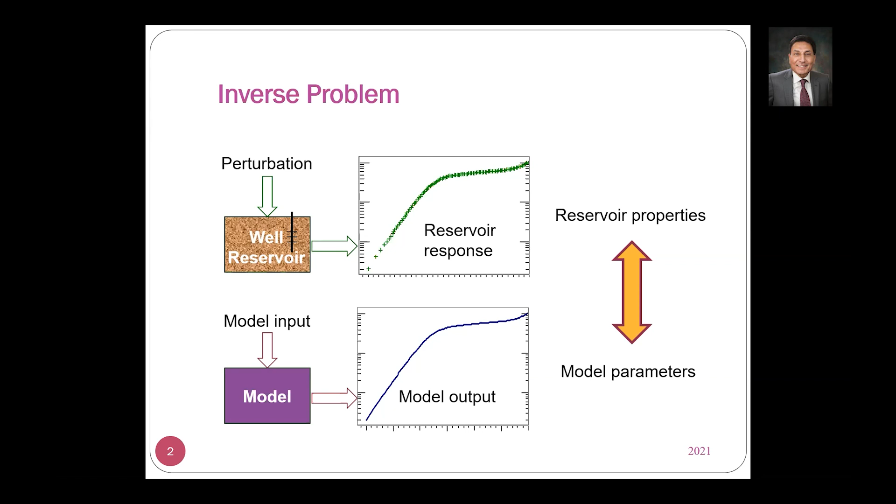The way we do that is, if we have a reservoir model like the one you see on the left side of your screen, we actually perturb that reservoir and watch how it reacts to that disturbance. Then we have a model based on the physics, and we send the same input as we perturb the reservoir, and watch the response of the model. What we try to do is make sure that the model output and the reservoir response match, and from there we can deduce the reservoir properties.

Specifically in well testing, we do the perturbation first by lowering a pressure gauge into the wellbore, and then most of the time we change the flow rate. When we change the flow rate, we watch how the pressure in the well changes with time. As you see in that picture, we try to match the data collected from the well, the dotted points you see there, with the model calculated solid curve. When they match, we know that the properties we entered in the model can be considered the same properties as in the reservoir.

Once we have good data, we look at it and identify different flow regimes for the well test: one flow regime has to do with the wellbore properties, one has to do with fractures around the well, and one has to do with the reservoir properties itself. Once we identify the flow regime, we select a well and reservoir model based on that. To do this, we usually need some help from additional data like geology, well logs, cores, well completion, production data, etc.

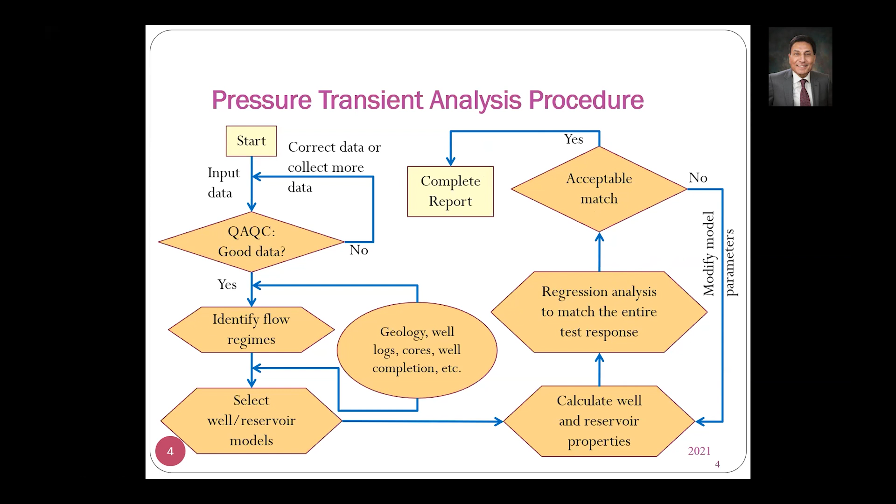Now, when we talk about gas wells specifically, in the development of transient testing models, we originally used slightly compressible fluids like oil and water. But gas properties are strong functions of pressure and temperature, so they are not what we call a slightly compressible fluid.

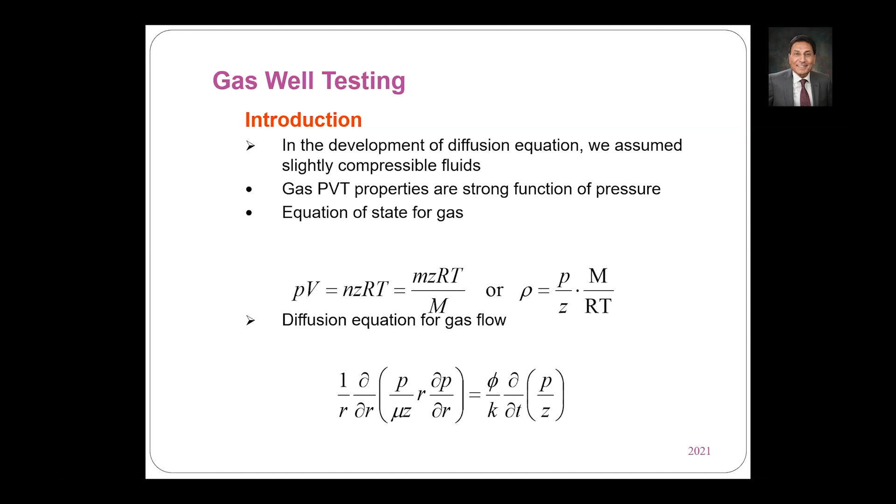So we use the equation of state for gas, which you're all familiar with, and we need to use this information to analyze the data from well tests. So what did people do a long time ago?

They said, well, if the reservoir pressure is greater than something like 5,000 psi, then the pressure is high enough that the gas will actually perform like a liquid. For that part, they simply analyzed the data using pressure versus time, just like they did with oil and water wells.

And they said, if the pressure is less than 2,000 or 3,000, somewhere in that range, then the properties of the gas, the viscosity and compressibility, would be constant, and we can use the square of the pressure rather than the pressure in analyzing the data.

Now this part in the middle became the no-man's-land, where neither of these two methods worked very well. However, there's a lot of literature, a lot of work done, that actually uses both the pressure and the pressure square.

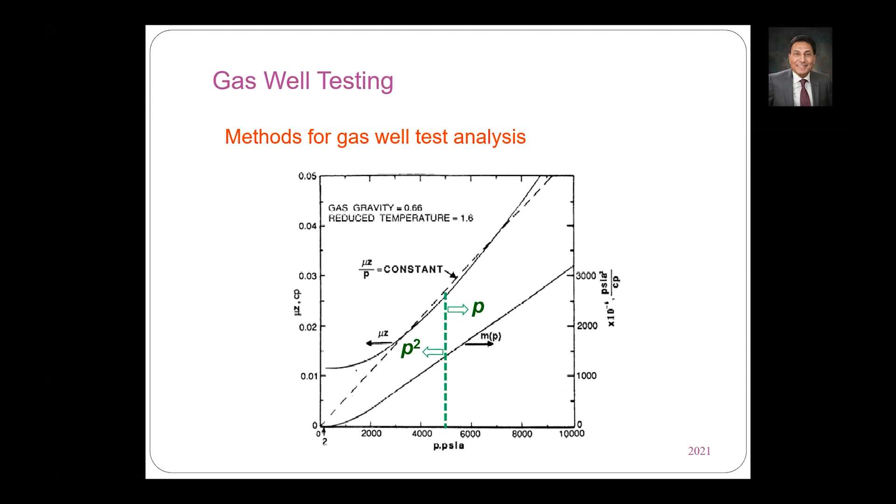Then in 1966, Rafi Al-Hussainy and Hank Ramey, who were doing research at Texas A&M University, provided us with a new solution.

They said that rather than using either the pressure or the pressure square, you can use a function called the pseudo pressure function. You can see the pseudo pressure function is the pressure over the viscosity and the compressibility.

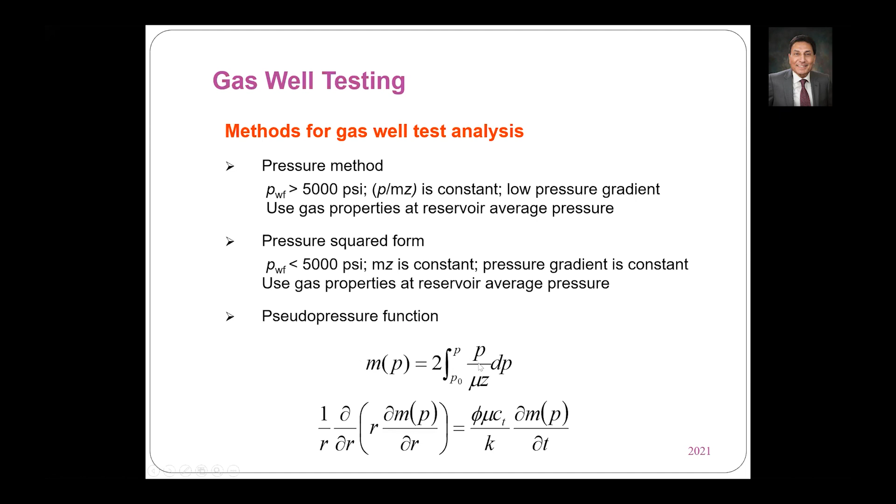It's an integral of this parameter over a range from a given standard pressure to the actual pressure that you have. The point they made is that if you use the pseudo pressure function, then this function is valid no matter which pressure range you're in.

So the values of the pseudo pressure numbers are usually something like 6 times 10 to the 12, to the 6, or 7 times 10 to the 6, a large number. Some people don't like to look at the number that way; they prefer numbers closer to the pressure number.

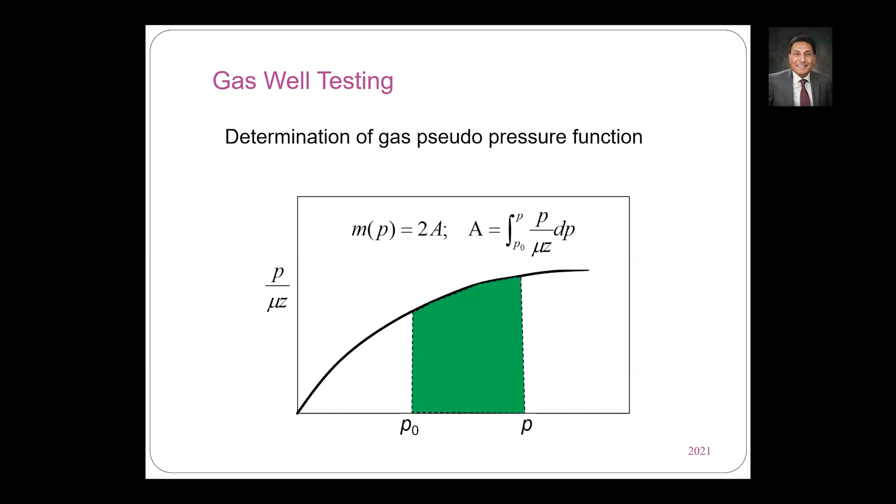So they figured maybe we can use something called the standardized pseudo pressure, in which they simply divide the pseudo pressure by the reservoir pressure. This way they find numbers closer to pressure, but it doesn't change anything as far as the analysis. The pseudo pressure function is valid no matter which pressure you have, it will work for you.

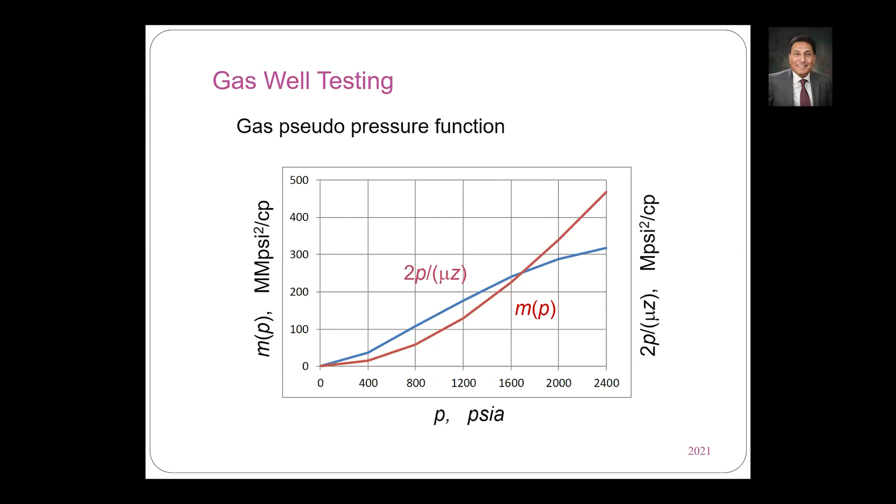And we do the analysis with the pseudo pressure just similar to the analysis we do for slightly compressible fluid like oil and water. Now, one of the other important things about gas wells is that because the viscosity of the gas is very low, the flow rate in the well inside the reservoir is very high.

This means that the pressure drop is much higher than if you have laminar flow. If you don't take into account the fact that you have turbulent flow, you have this larger pressure drop, and that larger pressure drop will actually show up as damage.

We all know that one of the parameters we calculate from pressure transient testing is the damage. But if we are not careful, the number that we calculate is actually made up of several parameters, not just the actual damage around the reservoir.

We also have something about partial penetration, if the well is not completely penetrating the reservoir, if we have perforations that are not completely functioning properly, something about fractures, segmented well performance, and so on. All these are beyond the scope of this lecture, but we'll touch on these points here.

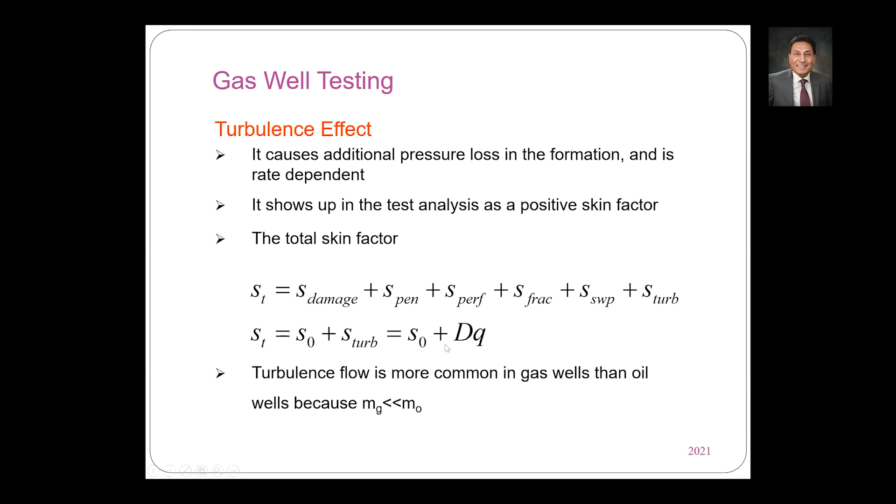So the turbulent flow skin is actually a function of the flow rate. You can think of it as a constant times the flow rate. So now you can see that the equation of the total skin is like the equation of a straight line, where this is the slope and this is the intercept. So the equation would look something like this.

So in order to find out what the actual skin is, we have to run a test at different flow rates, and then make a plot like this where you have the measured skin versus the flow rate, with different points from the different flow rates. When you extrapolate this line to a flow rate of 0, the intercept would be the actual skin.

I would like to show a demonstration here for this part. So I'm going to go ahead and change the screen that I'm sharing. I'm going to open that icon there on the left.

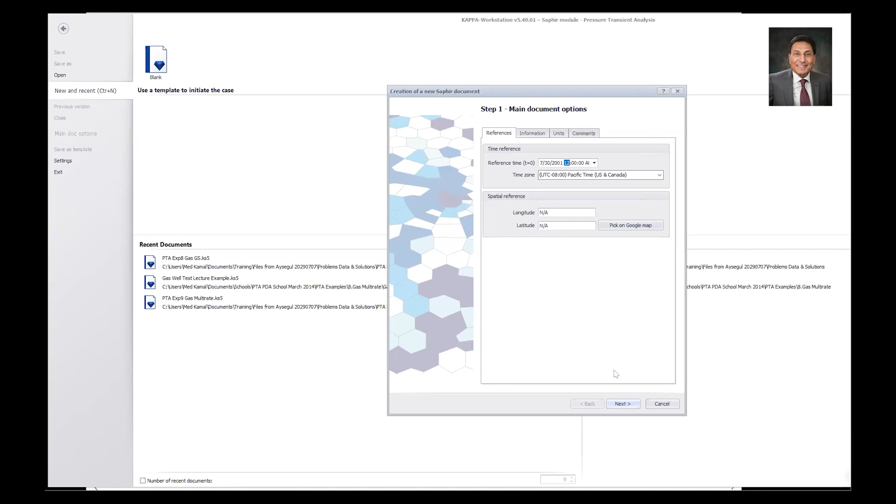This is called Saphir. Kappa has different parts, but the pressure transient one is called Saphir, which you can see now. And with that, I just put the reference time, and I'm going to say next. In this example, all I'm trying to do is demonstrate the concept.

So we are not going to be worrying specifically about the specific parameters. One thing you can see on this screen is that there are some parameters marked or colored in red. We need to give credit to the engineers from Chevron who came up with the idea and suggested to Kappa that whenever there are values already populated, not the values the engineer wants to input, but values that are there by default, they need to be marked so the engineer recognizes that they need to change this number because it's simply not what they have.

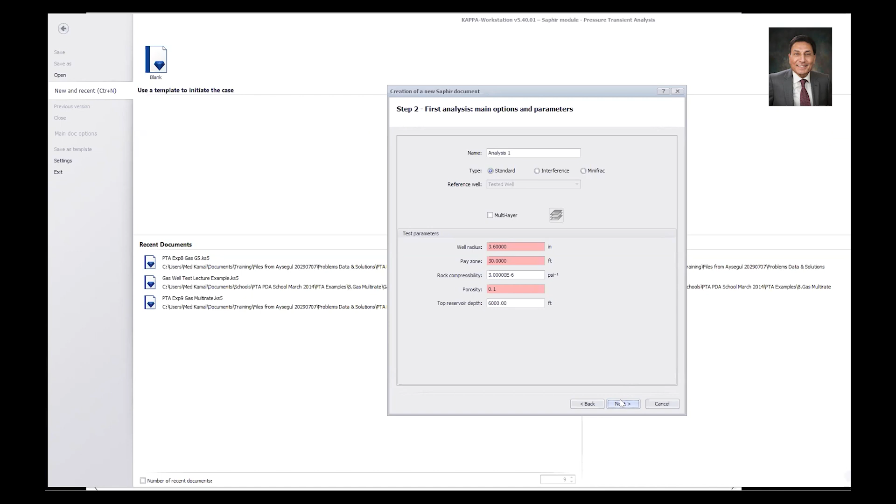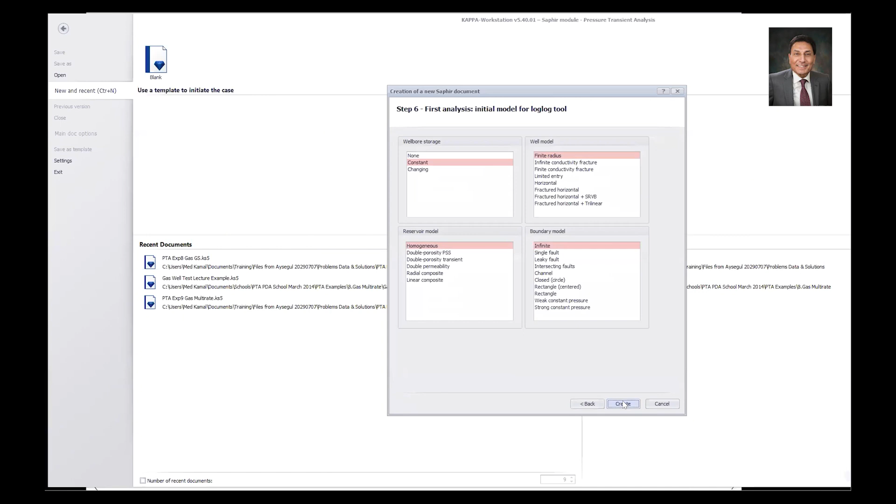The first data that we need to load is the flow rate. Actually, in the software, you follow the icons from the top to the bottom that give you the steps you want to take. So for the flow rate, I already have a file for that, and I am going to click on that file and open it.

And in order to characterize these numbers, the program shows them like that. I'm just simply getting the program to work. My intention in this lecture is not to teach people about software—I'm just using the software to show a problem.

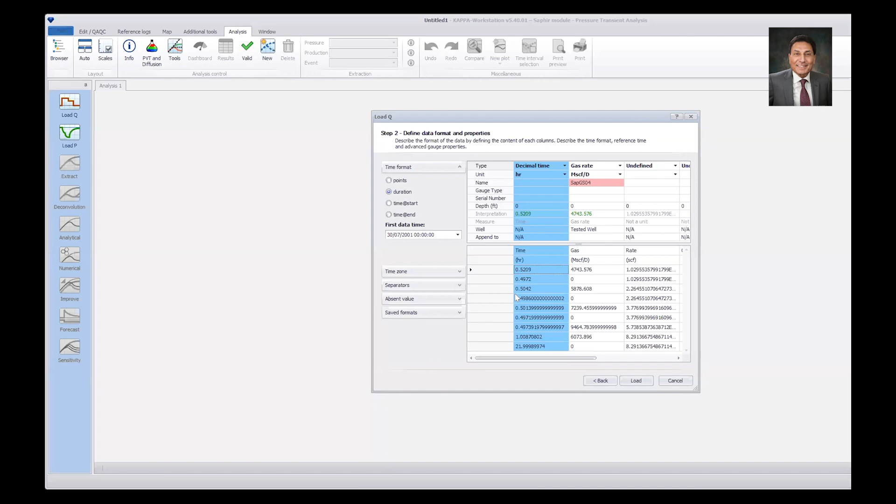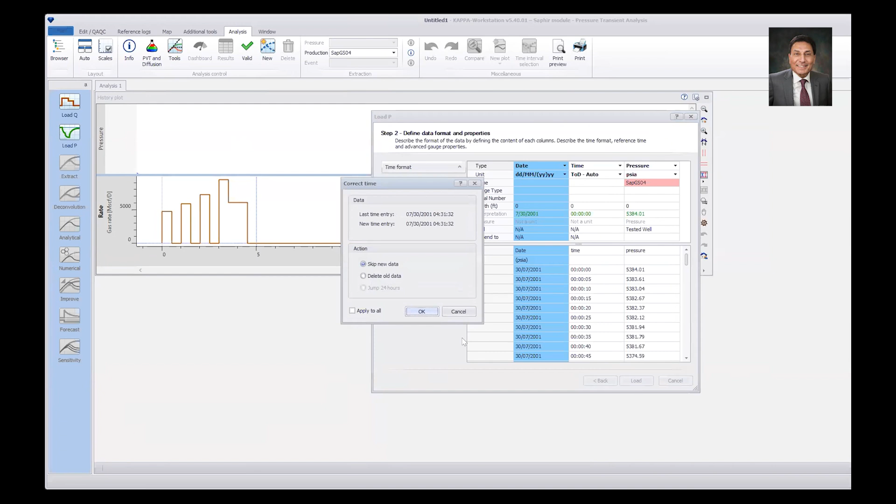So I'm going to load the flow rate, and then we're going to do the same thing for loading the pressure. I'm telling the program that I have a file where I have my pressure, and again I am going to tell the program to make sure I have the columns where the time and the pressure are, and we're going to say load. This is simple.

So you see in this example, what we did is we flowed the well at different rates, and at the end of each one of these rates, we have a buildup—a short buildup—and then at the end we have a very long buildup. This is usually the way we run the test.

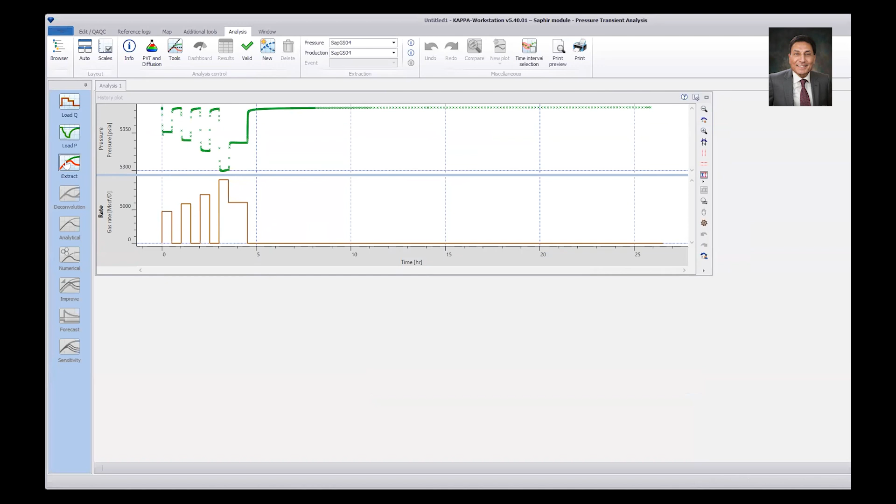Now, to do the analysis, we're going to start by extracting which pressure we're going to be working with. The program usually understands that you most likely want to use the last buildup, so it will allow you to extract it.

If I say OK, then the program, by default, assumes that if I draw a flat line, that will give me the value of the permeability. A unit slope line will give me the value of the wellbore storage. So that's the initial setup from the software, and I want to do an analysis on it.

So I'm going down there, going to the analytical model, and I'm going to say generate the model. Now you can see the model I have is not bad, but I can actually improve on this match. So I'm going to go to the improve part, and when you go to improve, you have the right to select which parameters you want to regress on.

We are going to use these parameters: the permeability, the skin, and the wellbore storage. I'm going to say run. Then the program, you can see, has a very nice match.

But this very nice match was because we analyzed the data from the last buildup. So if you look here on the history plot, you see that I have a very nice match at the end, but when I look at a different flow rate than this last flow rate, the match is not very good.

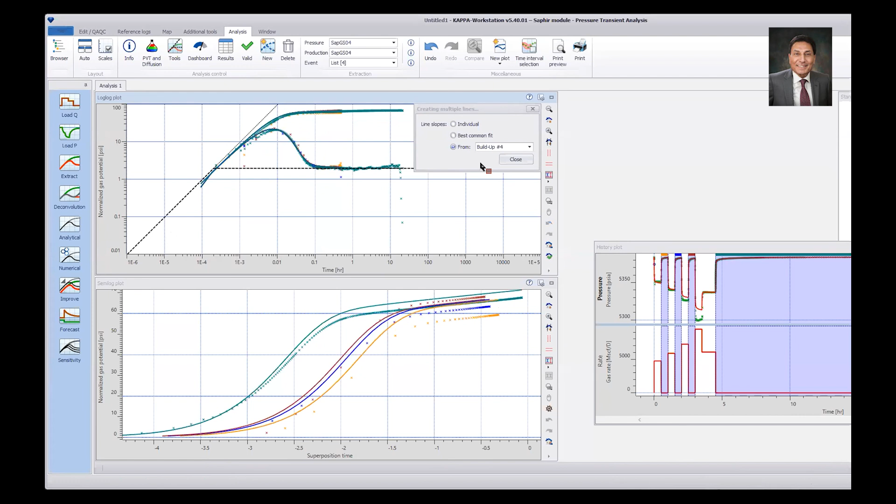This is the only place where I actually have all the buildup, and now you can see I have all the straight lines there. The program, based on each straight line, calculated the skin, and now it gives me a plot of skin versus flow rate.

So in order to do the match with the history plot, I'm going to go to this dashboard one more time. I really don't intend to teach software, I'm just using it to show the concept. So I'm going to look at the semilog result.

You can see here it's showing the semilog result. This is the skin at the flow rate of 0 - it's only 3.4. If you remember, when you ran the program at the beginning, it gave a skin of about 8 something. That was actually the skin at the last flow rate, but part of it was because of turbulence. This is the skin at 0, and this is the slope of the line.

So if we take this data and move it to the analytical solution, you can see that now I have a much better match on all the flow rates. I can actually also now, if I need to, maybe I should go.

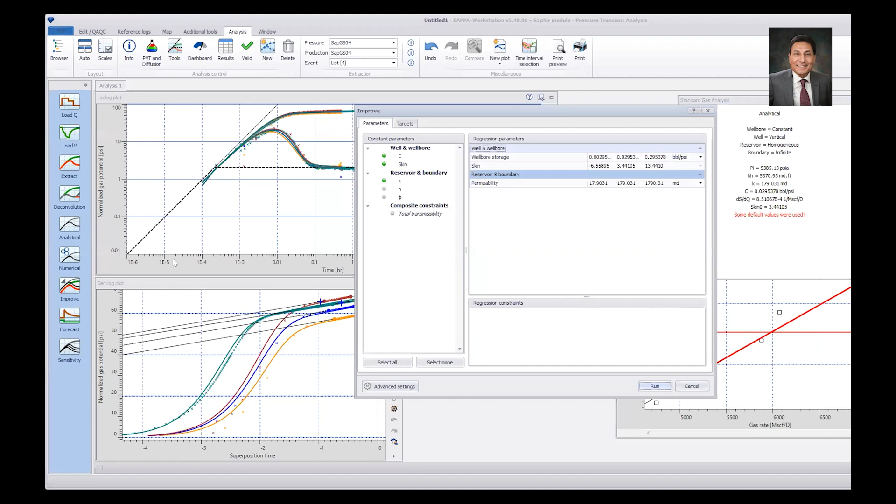So if I go to improve, I want to improve on the history plot, not the log plot. So I'm going to say I'm improving the history plot, and run. The improvement is small because we started with good numbers, a good match.

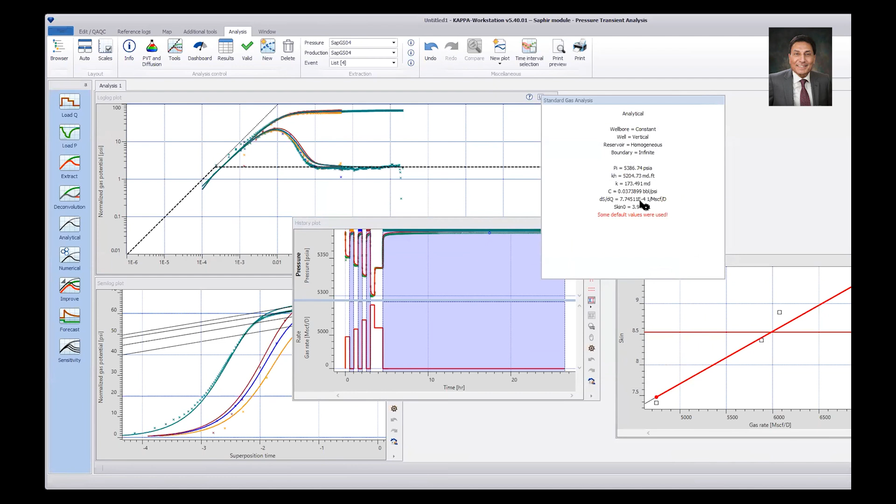So now this is the final result - I now know exactly what my skin is, 3.9, what the slope of the line is, and again what the value is. That is all I needed to do for that example. So I'm going to close this now.

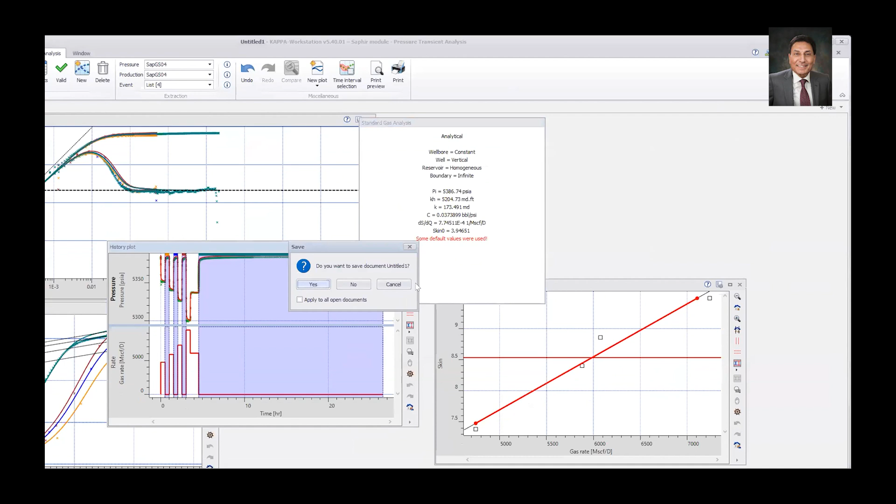Model demonstration. All right, so the next item we need to talk about for gas well testing is deliverability testing.

This is one of the things that's different for gas wells than for oil wells, because you produce gas from wells and you don't store it in tanks - you actually have to immediately transport it to wherever you're going. So there was a question about deliverability testing.

It's a nice story, and I think it's very important for people to recognize the origin of deliverability testing. In the United States, there are states that are rich in oil and gas, and some states are not. So people producing gas from oil-rich states were actually producing gas at very high rates.

There was a question: if everybody produces their gas at the highest possible rate, two things are going to happen. The price of gas is going to decline, and they are going to exhaust all the resources. So they figured out they needed a way to control gas production from all the states to keep the price reasonable and preserve resources.

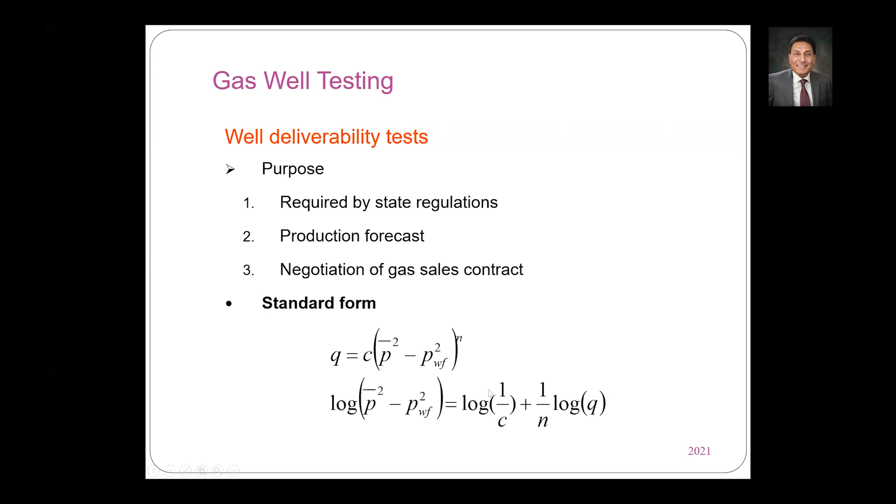So if I make a plot of the flow rate versus either the difference in the pressure squared or the pseudo pressure, then I can find a straight line. The slope is 1 over n.

And the point is that if I flow my well and get to the point where I have it completely open, in other words there is no back pressure, then at that pressure, this is the flow rate. This is the absolute open flow rate. And based on that absolute open flow rate, that's what's going to determine the deliverability of the well.

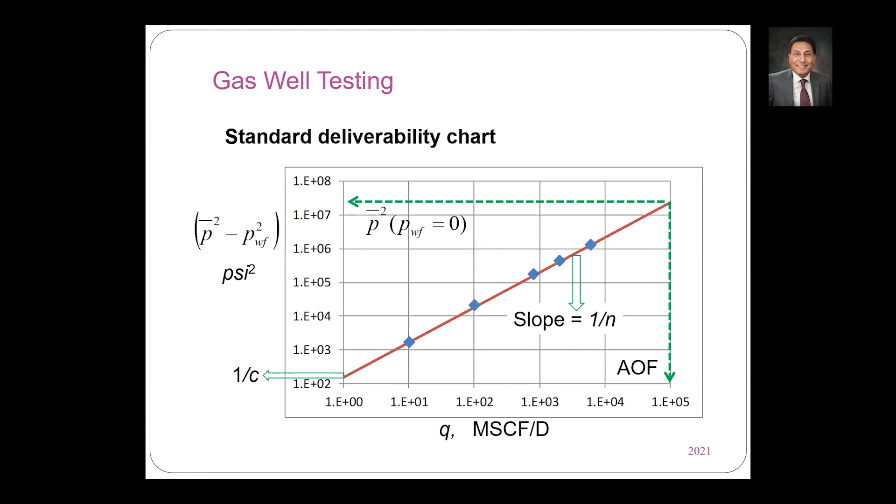So the point is, who's going to do that? You're not actually going to open your well and let it flow for a long time in order to do that, because when you look at the behavior, the slope of the line is going to be the same — it doesn't matter how long you flow the well. But then the intercept C actually decreases with time as long as you produce through the well, and asymptotically it gets to the point where this is the value of C that we wanted to use.

So in order to do that, we said, okay, if I produce my well at different flow rates, and at some time I measure the pressure, then I'm going to have a straight line that looks like this. Now if instead I flow my well for a longer time, I'm going to find a straight line again with the same slope, because 1 over n is the same. However, as time goes by, I find that straight line keeps shifting to the left, in order to get me to the point where I have calculated the value of C.

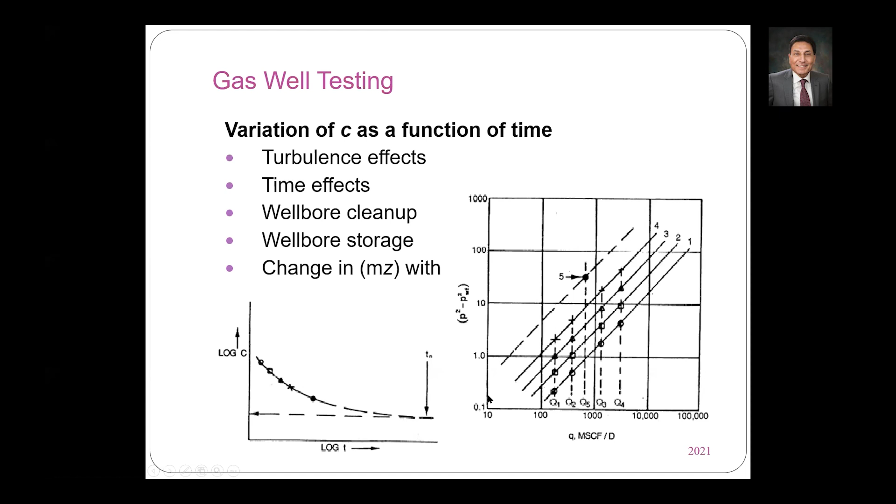So people figured out, okay, I really don't want to flow my well for a long time, so they figured out different ways of doing that. Now, the point is that if you flow your well at the beginning at small flow rate, you have laminar flow, and the data would look something like this — n is 1. If you flow your well at a high rate, you're actually going to go into turbulent flow, and then your data are going to follow this line. Usually your data go from small flow rates to high flow rate.

And if you calculate the absolute open flow at that very low pressure at the wellbore, that's going to be your absolute open flow. However, as you can see from the plot, if you actually use the laminar flow line, you calculate a higher absolute open flow rate.

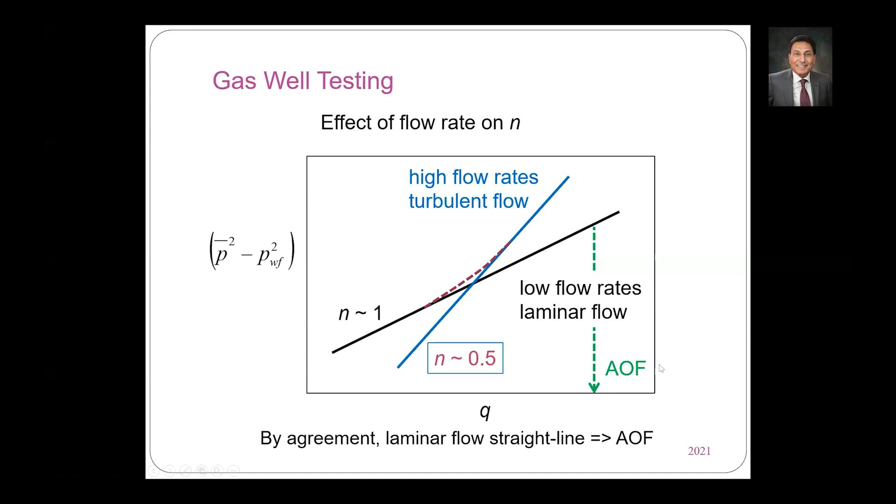So somehow they have an agreement at the beginning that this is the line from which you are going to calculate the absolute open flow rate, not the real number. That's the way they agreed, and that's the way it is.

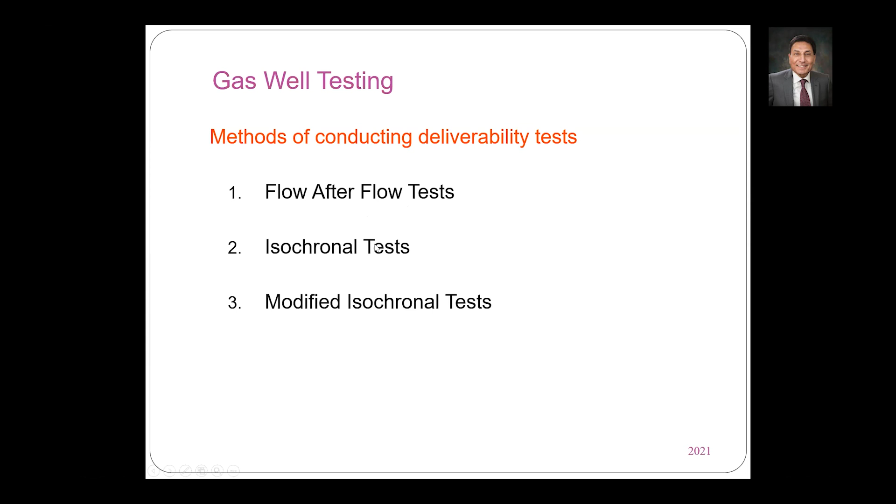So how do you actually run the test? There are several ways. First, people said, we're going to flow the well rate after rate and measure. There are other two methods I'll show in a minute. In the first case, you flow your well at different flow rates, and every time you wait until you reach steady, constant pressure, or the pressure doesn't change much, and from there you get the data and make your plot and calculate your absolute open flow potential.

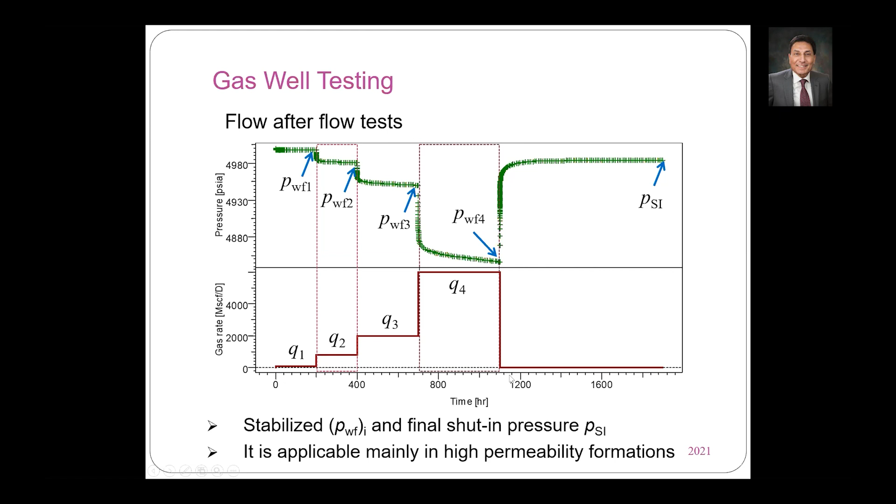And then people say, wait a minute, I don't want to flow my well for a very long time all the time. In order to calculate that, you need to reduce the test. You can see here, these are very long times. So the new idea was the isochronal test.

And then, as you say, people are never satisfied. They say, no, wait a minute. Every time I have to use a higher flow rate, I have to shut the well in for a much, much longer time. And that wastes a lot of time.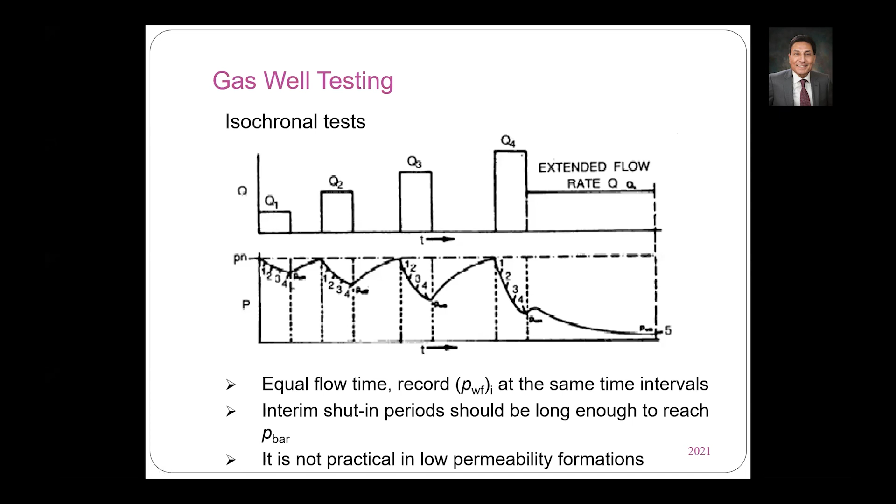So the final case was the modified isochronal test, where you don't shut the well in until you reach the initial pressure. You actually shut the well in for a time that is equal to the flowing time, no matter what.

And the difference here is that when you're actually calculating the value for your plot, instead of using the reservoir pressure at every one of these flow rates to subtract the flowing pressure from, you actually use the pressure at the beginning of each one of these steps. By doing that, it was shown that you will be able to get exactly the same result as if you ran an isochronal test.

So the modified isochronal test is the way it's done. And if you remember, in the example I showed you when I was showing the software, that is exactly what was being done.

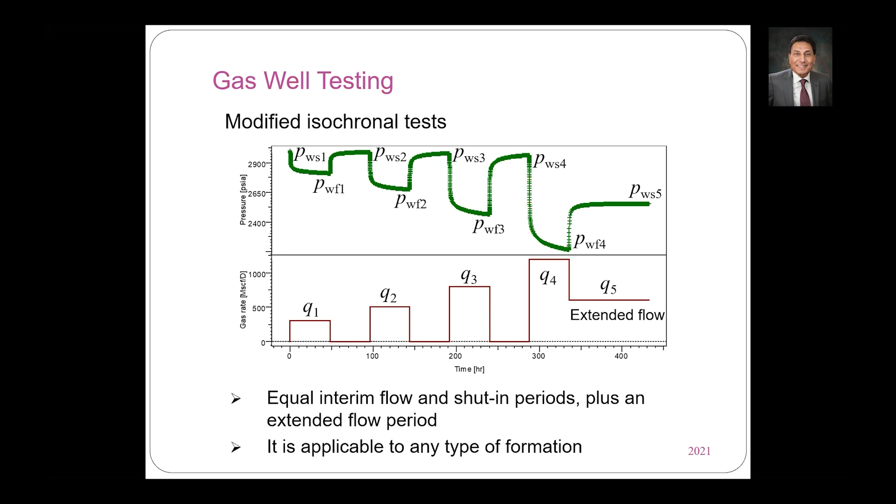I was also asked to talk a little bit about unconventional resources. So the unconventional resources have, as I say, good news and bad news. The good news is that you have a very large volume of them, because we are not really looking for reservoir quality, where gas has migrated and kept in there. We are actually looking for source rock where the gas is there, but the permeability is low.

So the good news is that we have a lot of it. The bad news is that the permeability is very, very low. Actually, the permeability is in the nanodarcy range. So when I try to analyze data from unconventional reservoirs...

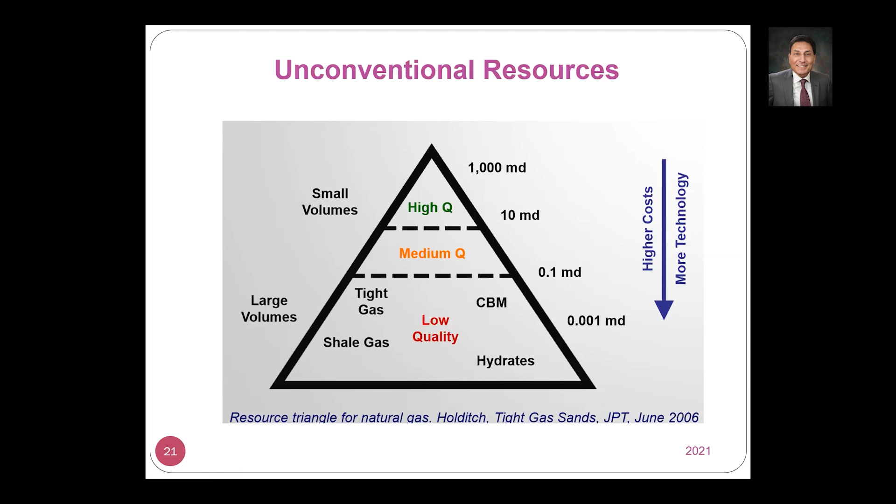Before I get to that, I just want to say that when people started producing this unconventional, or tight, reservoir, that became a very important thing, especially in the United States, where there is a lot of production of oil and gas. And as all of you probably know, in the last few years, the United States became the largest producer of hydrocarbons, this is oil plus gas. The United States also became self-sufficient.

Now, one of the good things that happened with producing a lot of gas and using a lot of gas rather than using oil or even coal, is related to the production.

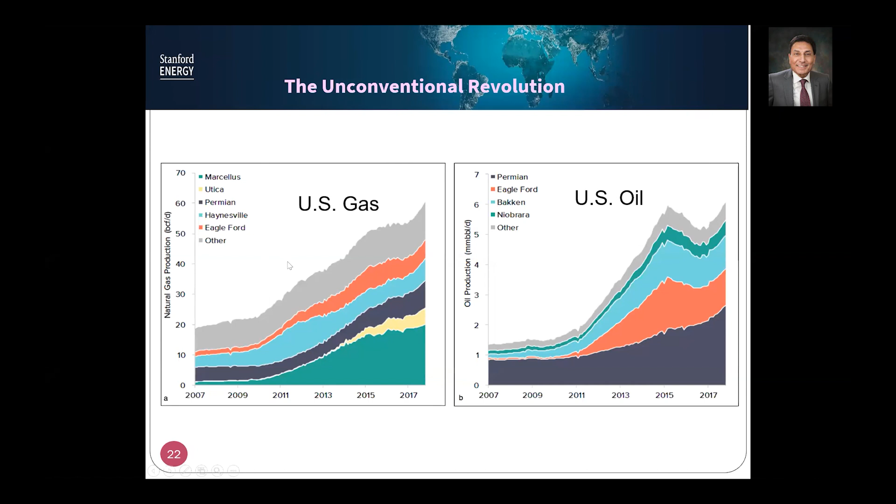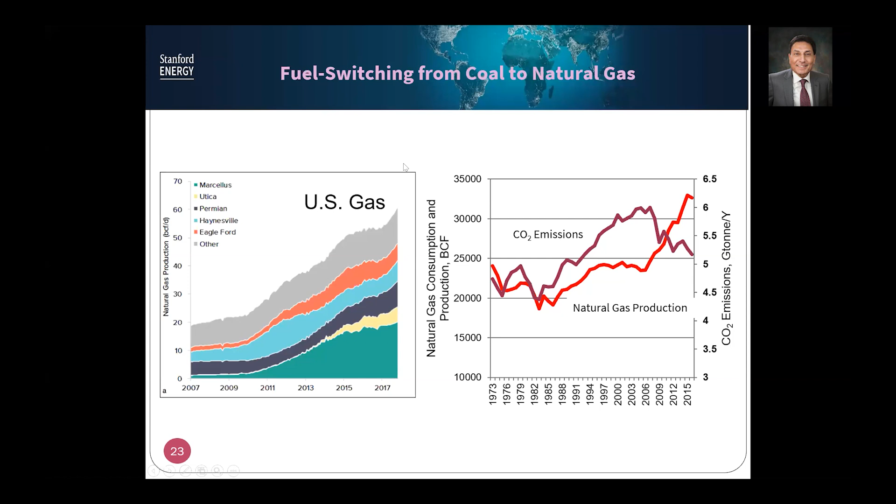One advantage that happened is that as they increased the production of gas, the carbon dioxide emission actually decreased considerably, and that will help us later on. I need to give credit for these two slides to Dr. Naomi Boness from Stanford University, who gave them to me.

So now let's go back to the point we're making. If I'm trying to analyze data from an unconventional reservoir, as you all know, we drill a horizontal well, and we have several fractures along the horizontal section. This is how we're able to produce at commercial quantities.

So if I look at data collected from testing an unconventional reservoir, first I'm going to find data that tells me I have a fracture. Then I'll have data telling me there's an area around the wellbore that's fractured and producing. Then I'll have data showing a horizontal line, like in the previous example, that tells me the reservoir properties, the permeability, and finally a line that tells me the volume.

So when you look at that, you say, what's the big deal? I can run a test and find all these parameters. The point is that, for example, with tight formations, in order to reach this straight line, you actually need to run the test for something like 10,000 years. And I doubt any engineer listening to me is going to go to their management and say, if you let me shut the well in for 10,000 years, I'll come back and tell you something good about your reservoir. Of course, we're not going to do that.

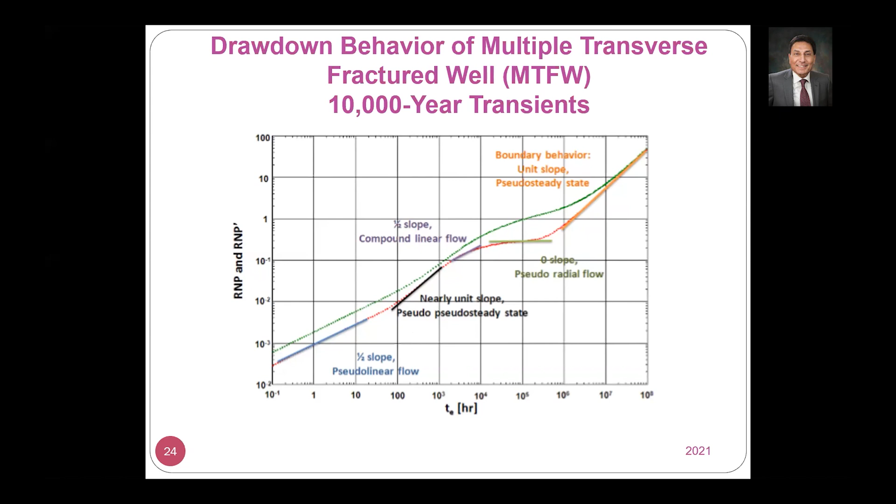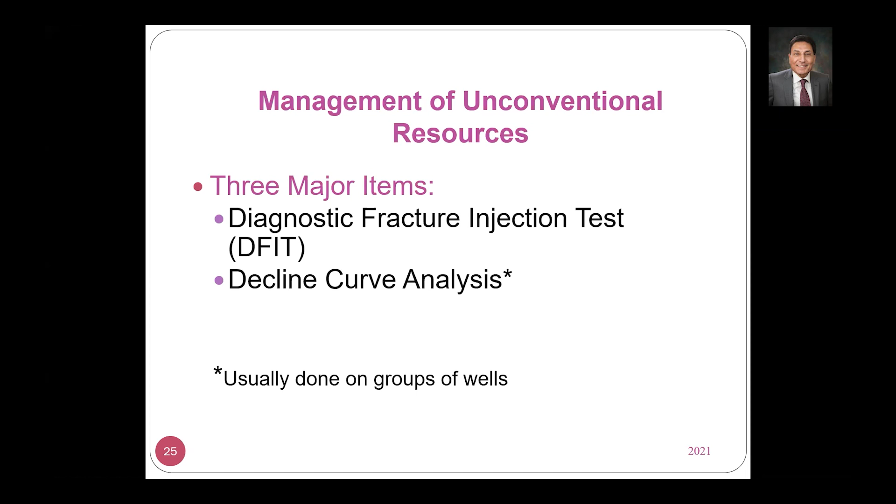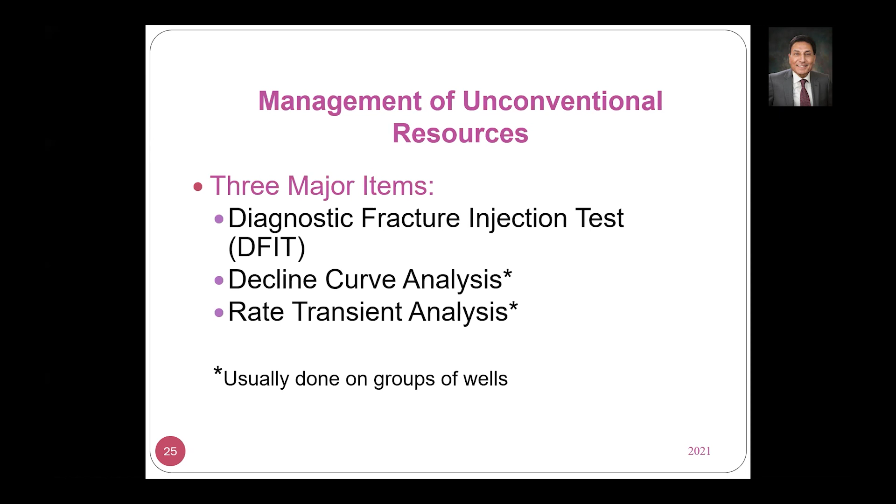So we have to find other ways to characterize the reservoir. There are three major items we use. One is that we use the data during fracturing to give us diagnostic analysis. We also use decline curve analysis and rate transient analysis, which I'll talk about a bit, based on how much time we still have. You probably all recognize what decline curve analysis is.

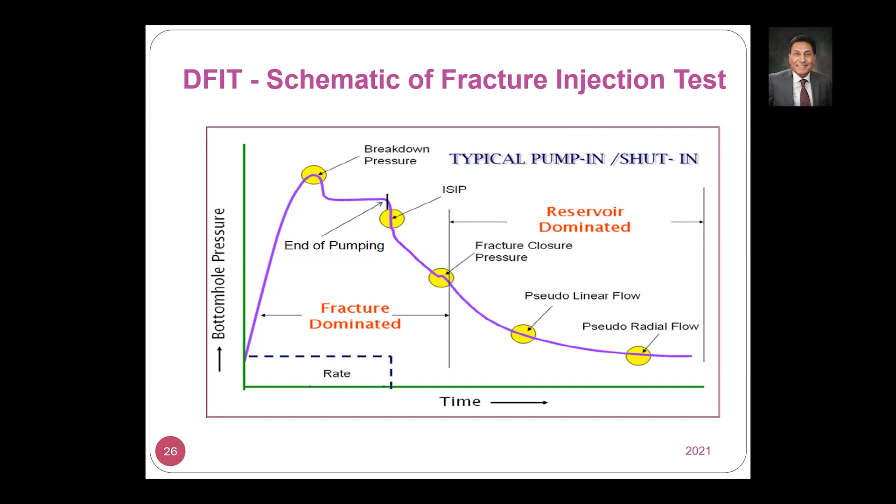So the other thing is, you say, I don't have to run a test, but I'm going to start producing my well, because that's what I need to do. I need to produce my well, and then look at the production data, and from that data characterize my well. This is when we use decline curve analysis.

Decline curve analysis, as most of us know, was developed back in the 1920s, where we simply say: if I make a plot of rate versus time while producing my well at a constant pressure, I can see how my rate declines with time. If I take the last part of that line and extrapolate it bit by bit, I'm in good shape. This is what decline curve analysis is.

Now, Arps in 1945 started to say, I can write a mathematical equation to describe this curve. This equation doesn't have any physics in it, it's simply a mathematical function to match the data. By the way, this is exactly what machine learning is—when you hear about machine learning and data analytics, this is exactly what happens, except the equations we use now are a little more sophisticated. So Arps's equations say: I am producing my well at constant bottom hole pressure, and I'm seeing how the rate changes.

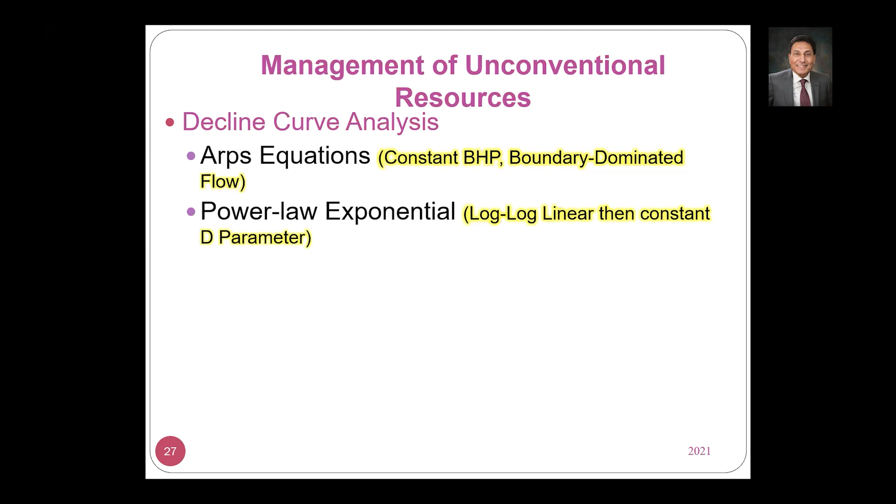However, in order for this to happen, I must be in the boundary dominated area, which of course could take much longer to reach in an unconventional reservoir. So people started using different modifications to the ARPS model to find a better match for the data. When you actually look at the data with the different models, you find that we have a little problem.

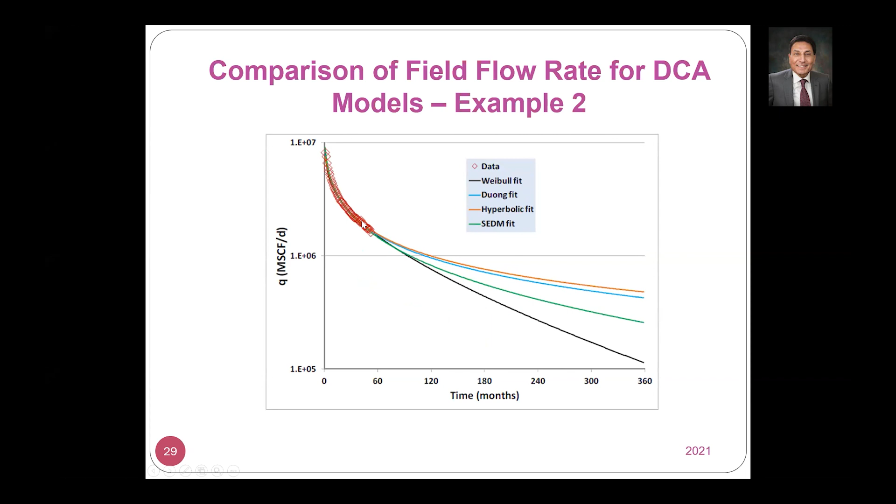So what we do now, one more time, this is all what we have. We cannot run a test. All we have is the actual production data. With this production data, I don't know which model to use, since they all match very well. So what we do now is we actually average this.

We use the alternative models that fit the data, and then we do a model averaging. We average the results from all the models. Some of them we average using the generalized likelihood estimate, which gives a weight to each model based on how good it matches the data, and then we do the averaging.

And also sometimes we say, I'm not going to look at all the models, I'm only going to look at the top 2 or 3, and I'm going to do the averaging with them, and do the work.

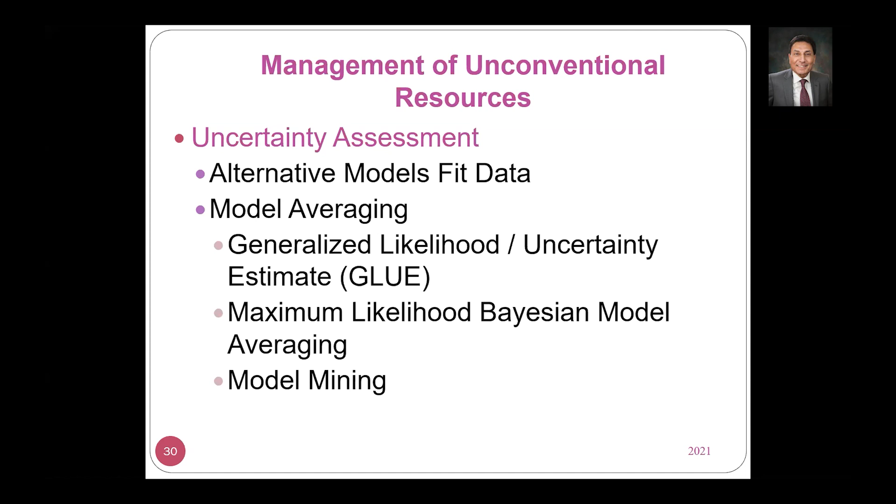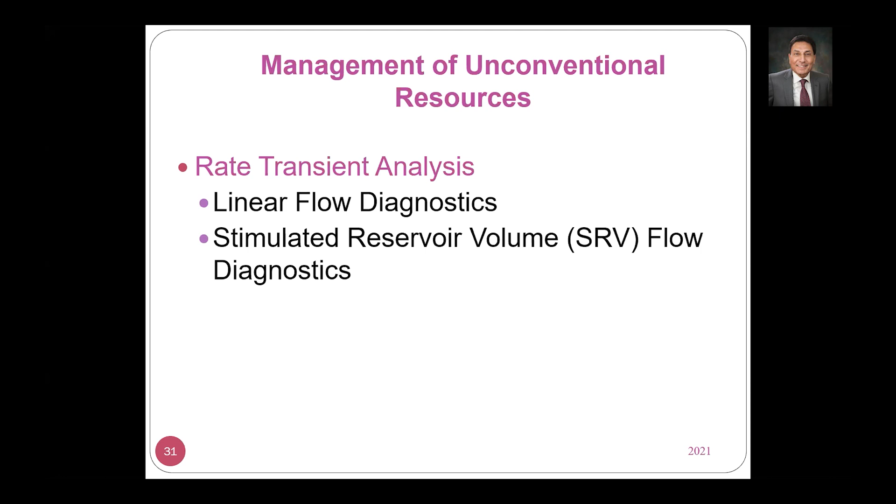Another way of doing it is to say, okay, I'm going to look at the rate transient analysis, which is similar to pressure transient analysis. I'm going to try to find out if I can do some diagnostic analysis, find out if I have some linear flow from the fracture, some data that shows me the reservoir volume from the stimulated area, and I do the history matching with that, and do the performance predictions based on that.

So the same thing, the workflow we do now - remember that in order to have successful unconventional flow from a gas reservoir, we must have a very large number of wells, because each well cannot produce a whole lot. So in order to have commercial success, I have to produce from a lot of wells.

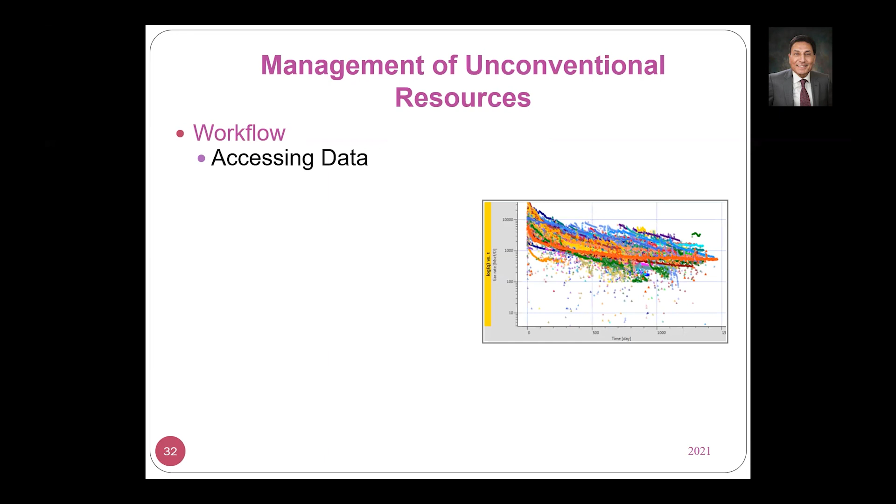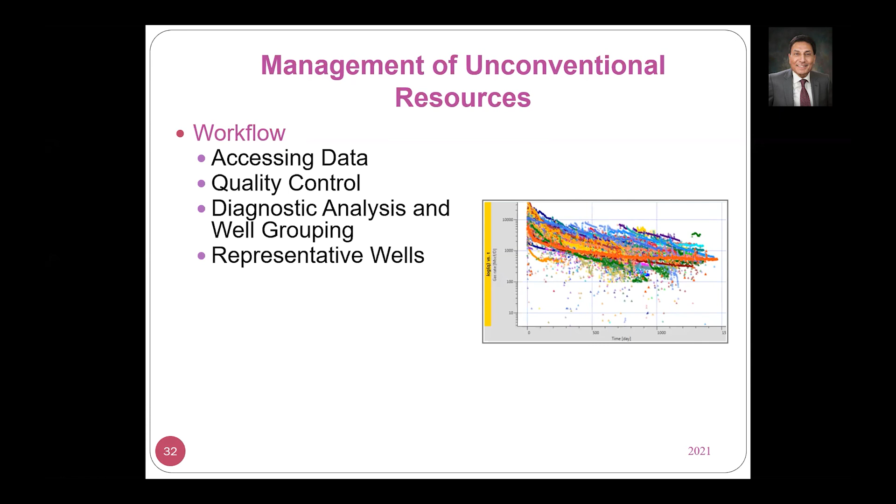The main reason for that picture you see on the right is to show you that we have data from lots of wells. So after we access the data, we do quality control, and then we group this data. Every group of data that is similar in behavior, we call one group and analyze that group. We cannot analyze all these wells, so we group them and analyze. From each group, we select a representative well, do the decline curve analysis on it, and then do generalization for the rest of the information.

Another way of doing the analysis is to use numerical calculations or reservoir simulators, but you need simulators that have in them the exact physics we have - horizontal wells with different segments of fracture, and each segment has in it several fractures. You also need to recognize that these fractures are connected to the natural fractures that exist in the reservoir.

So what we do is actually specify the basic reservoir or well pressure PVT data. We load the pressure and rate data that we calculated. And if there are some basic flow regimes we can identify, we do that. For example, we identify the part of the data controlled by the fracture, the part controlled by the volume of the stimulated area, and the part telling us about beyond that.

So we can do that, and then perform some basic analysis through analytical modeling, and then take this data and transfer it to a numerical model, which hopefully will have in it all the different complexities that exist.

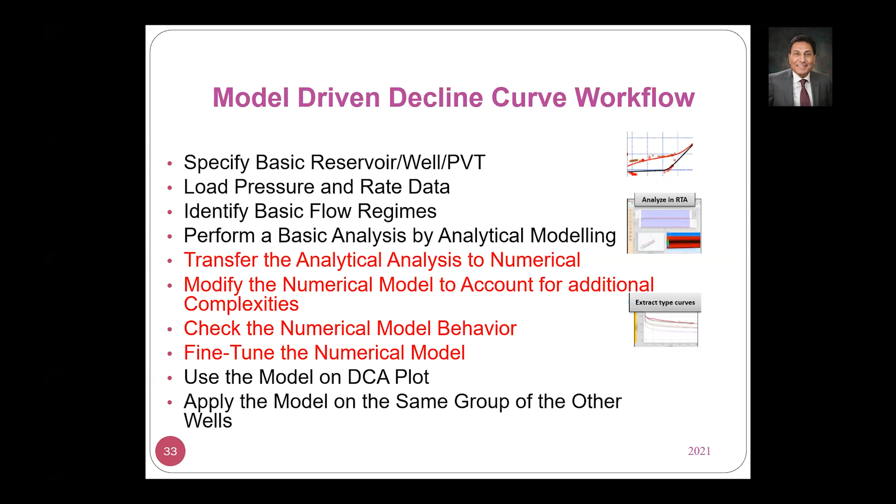Another question is, how can we identify the basic flow regime? You identify the flow regime by looking at plots like the Bourdet plot. For example, if you plot the pressure and the pressure derivative versus time, when you have a flat line, that means this is the radial flow regime—we call it the infinite acting radial flow regime. So that's one flow regime.

When you have a line with a slope of 1, this means the wellbore is controlling your pressure. And when, at very long time, you have a straight line of that same slope, that means the boundary is controlling—this is actually the part which is called boundary-dominated flow, relating back to the first question.

Now, if you have a fracture, there will be other lines here with different slopes. The fracture will have a slope of a half, which means your data will look like a line with half of that slope, and so on. So that is what identifying the flow regimes means.

Another question: could you please elaborate on the different regimes on the decline curve for the case of the DFIT curve?

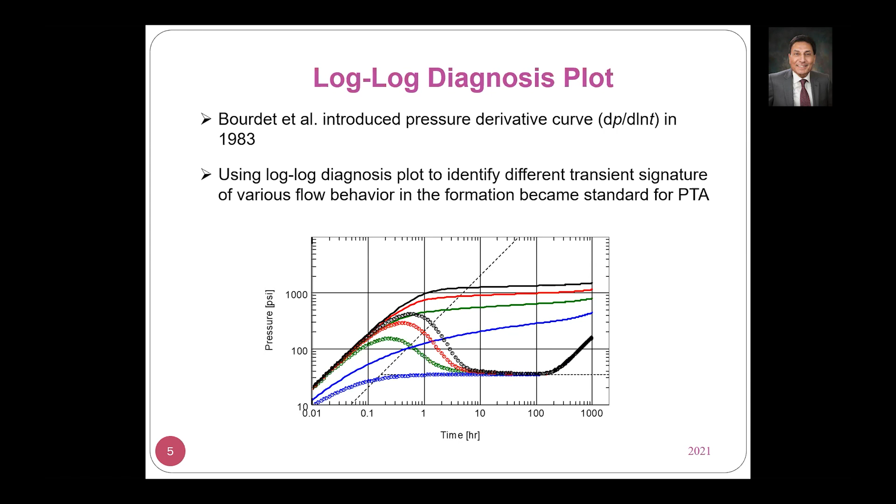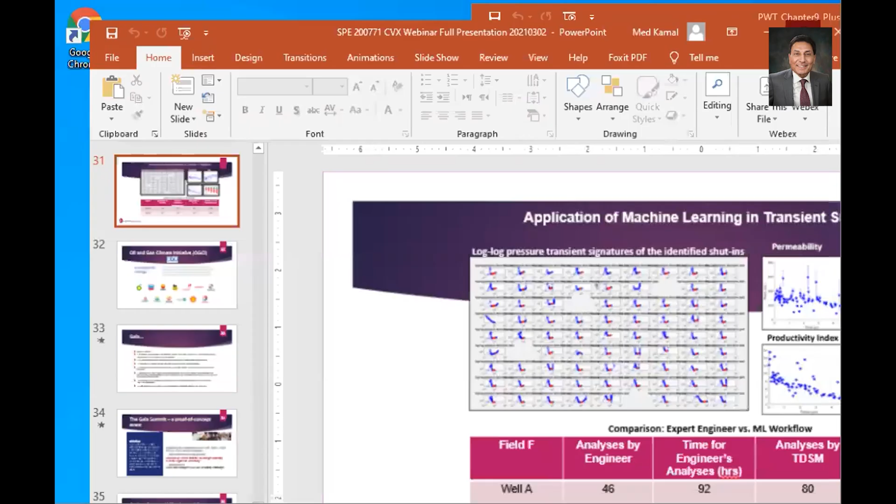There are actually a lot of papers that were done that way. Can you all see a slide that says 'Application of Machine Learning in Transient Surveillance'? Let me see if I can expand it. Okay, one more time, let me go back.

What you're looking at here is some really nice work done to answer the question of machine learning and transient surveillance. This work was done by people at Chevron. What do they have here? They have a reservoir, and this reservoir - I don't know if I can say the name or not, but it doesn't matter - is an offshore reservoir.

The wells are equipped with bottom downhole gauges, and this way they are having a lot of buildups. Every time somebody shuts the well in for any workover, they get a buildup. Now they have a very large number of buildup tests. Their work, by the way, is published - you can find all the details in this SPE paper right there.

So what they did is take the data from some of the wells and apply machine learning models to it. They wanted to use machine learning to analyze all this data because they have a very large number of tests and cannot analyze it manually. Every one of these is a test, and there are many in one well. Here are the results.

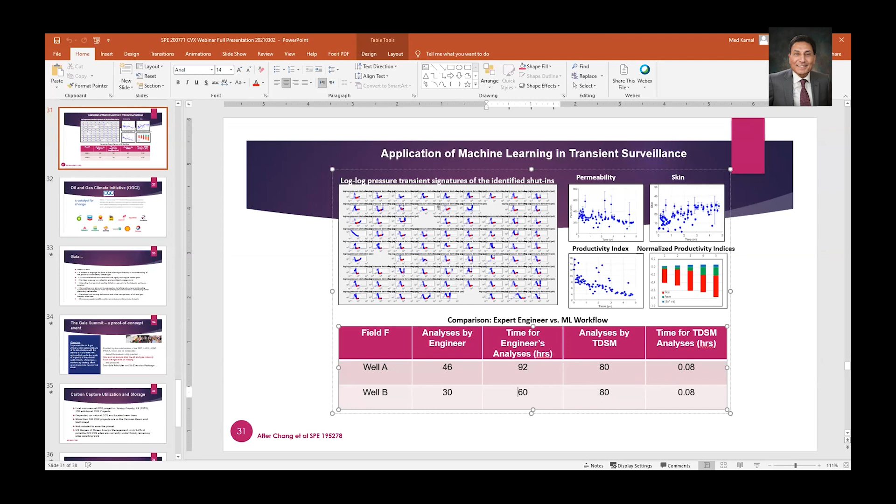So there's a lot of work done there, and it's available to view. One more time, if you guys have any questions, I'm sure you have a way to submit your data to Dr. Al-Harji, and I'll be glad to provide answers if you guys send them to me.